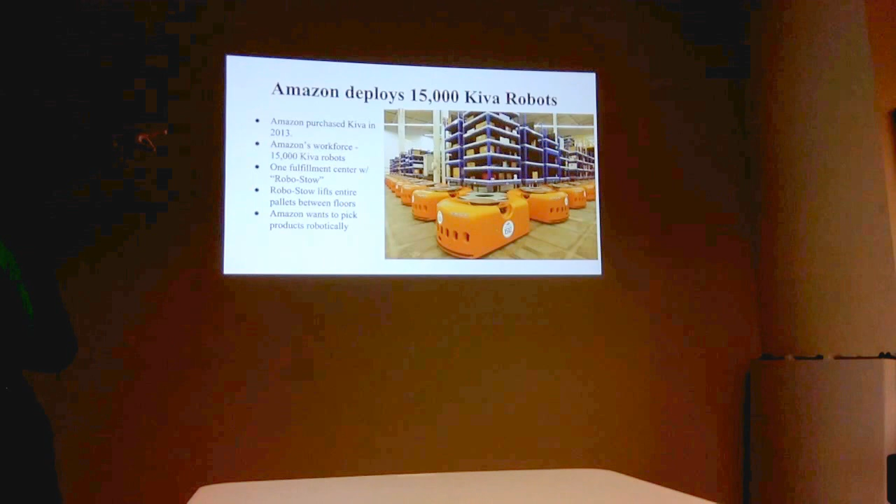One of the things you have to figure out is: what product am I looking at and how do I grab it? How many of them are in the bin? How do I get around? That's part of the challenge. We decided we would approach that with a Yale hand, and Steve's going to talk about that a little bit later.

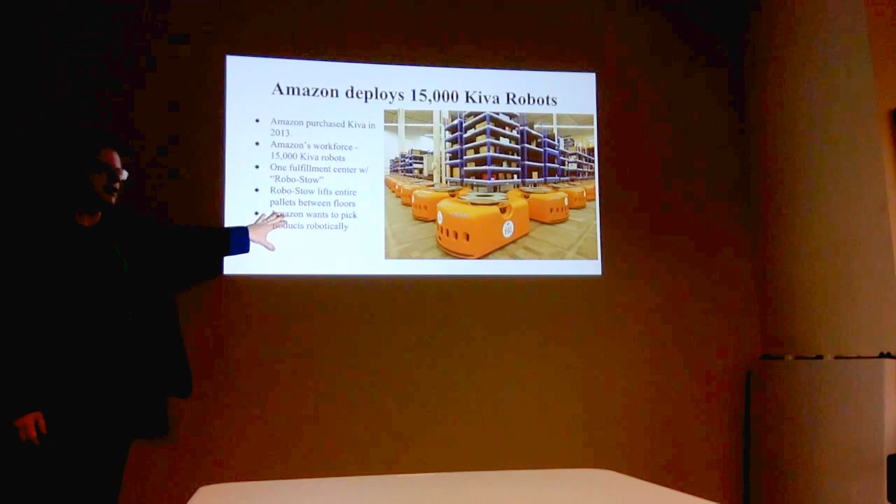Amazon is sponsoring the challenge. They bought Kiva a couple years ago and have now deployed 15,000 robots in their warehouse. They're picking something like 6 million products a day and expecting to double that. They only have robots in about 10 of their 50 centers, and one center has this incredible robo-stow that picks up pallets and moves them from floor to floor. So they are really automating, and we're going to help them displace another 2,500 workers by going through this process.

Let's talk a little bit about the shelf. It's 0.78 meters to the bottom, so we'll have a lift that gets us there. Then you have to pick out from the 12 bins - they'll tell you what's in each, but then you have to reach into your database of objects and get the right file to reference. Then you have to use the vision piece to perceive which object it actually is, where it is, and how you're going to grip it. Dylan's been working quite diligently on how you get in there and get things.

So it's pretty simple: pick and place from 12 bins. You got to pick it without breaking it, put it down without breaking it, and the bin at the end has to be on the floor when you're done.

Does it start out on the floor? The bin starts out on the floor. It must. Cool.

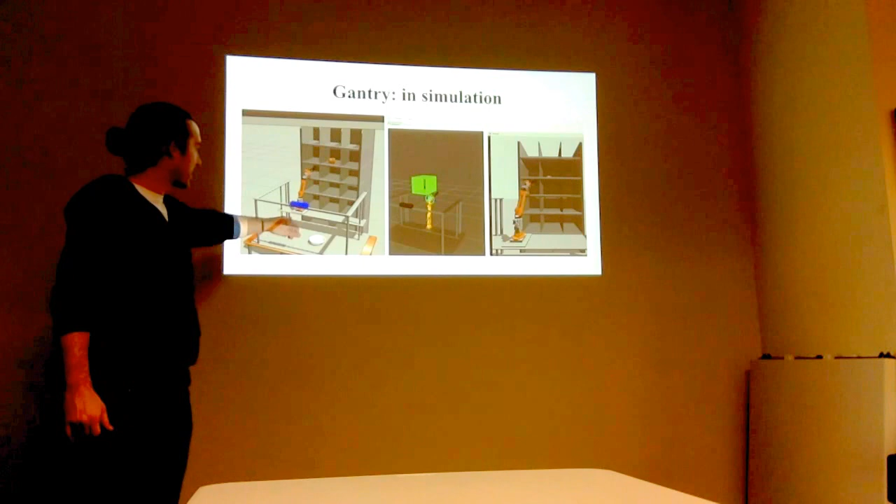So I'll jump in - that's the kind of challenge we're setting out to solve. We started by trying to model what we want to do in simulation. What we came up with was a frame that can be raised and lowered, with an arm attached to it. This is actually an open source arm, which Steve will talk about in a bit, that we found and built. The idea was you'd have this frame, and the frame would move the arm to the correct bin based on whatever the order was, because we know what's in each bin.

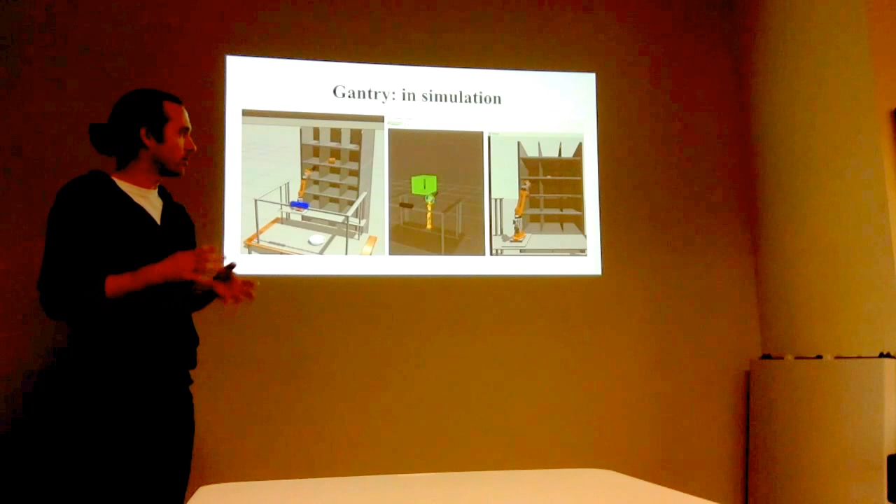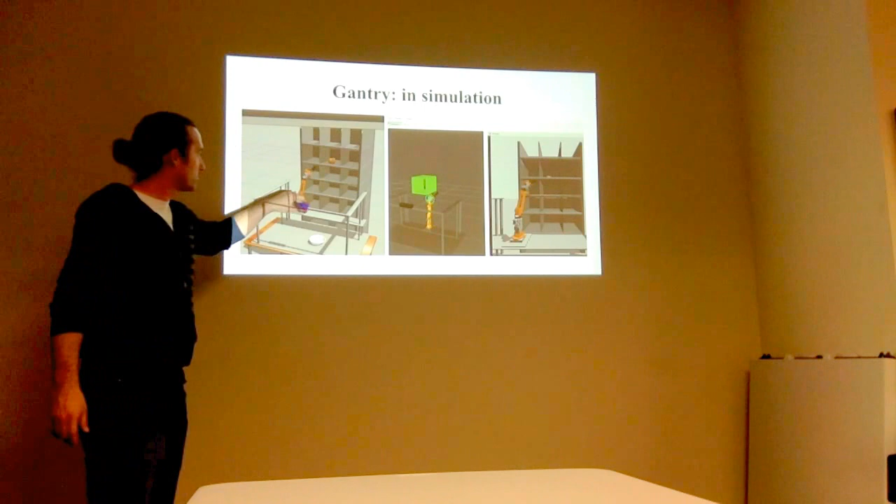From there we have a camera - this is actually in the simulation, this is the camera's view - which would find the particular object we're trying to grasp, and then the arm would reach out and grab it. We'll talk more about the software and hardware we're using to make that happen in a bit, but first I'm just going to talk about the status of the gantry, which is the thing that supports moving the arm to the right place.

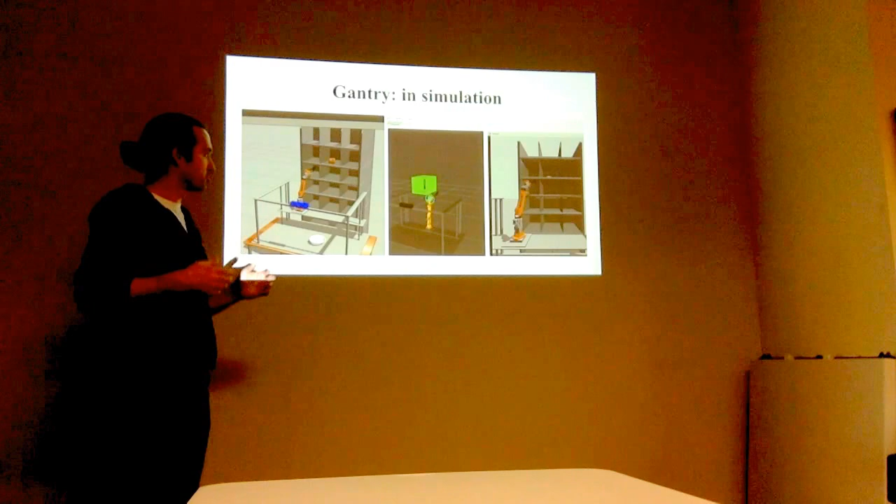So it started like this in simulation. This was something we did in Gazebo, and then we moved into CAD. So I kind of did a lot of this stuff, using a program called FreeCAD, which is an open source CAD software.

And we kind of modeled it out using 80/20, like a standard aluminum extrusion kind of building block system.

For the motion, you can't really see this that closely, but we decided to use lead screws attached to stepper motors, one here and then one at the other base there, for the Z-axis. So if we want the arm to go up, we have two stepper motors attached to two lead screws, which are like long screws. Those turn synchronized, and that raises or lowers the platform based on what we want to do.

Then likewise, for moving the arm left and right, we have another lead screw here, with a stepper motor kind of hanging off the end.

So really, we kind of modeled this after existing 3D printers. Like I have a Lulzbot TAZ 4, which has basically not the same design, but a very similar mechanical design. You know, two Z-axis lead screws, and then another one for the X motion.

And so we went ahead and purchased all this, what we could, stock from like McMaster-Carr and 80/20 distributors, different places across the internet.

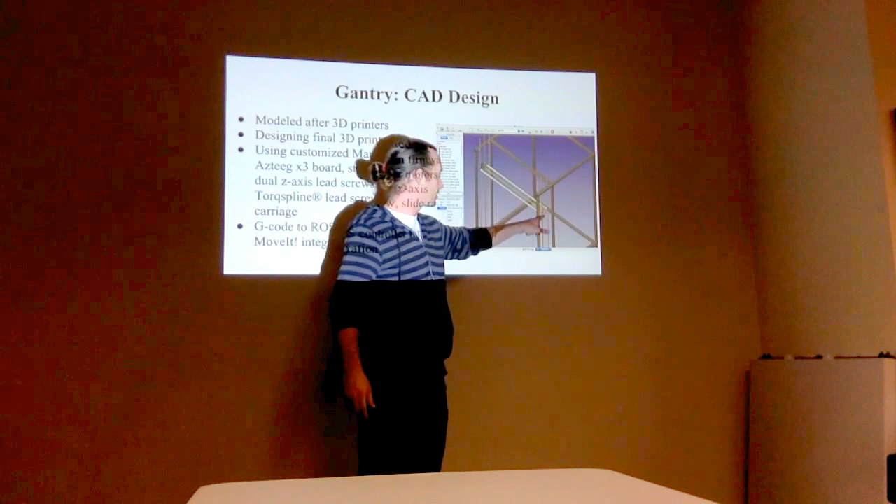But for these empty holes here, where these parts are floating in air, we're actually still going through the process of designing these pieces in FreeCAD and then printing them. So for example, I printed this part today, and I'm going to bring it to the office later. But this is going to go up here and hold the top of the lead screw.

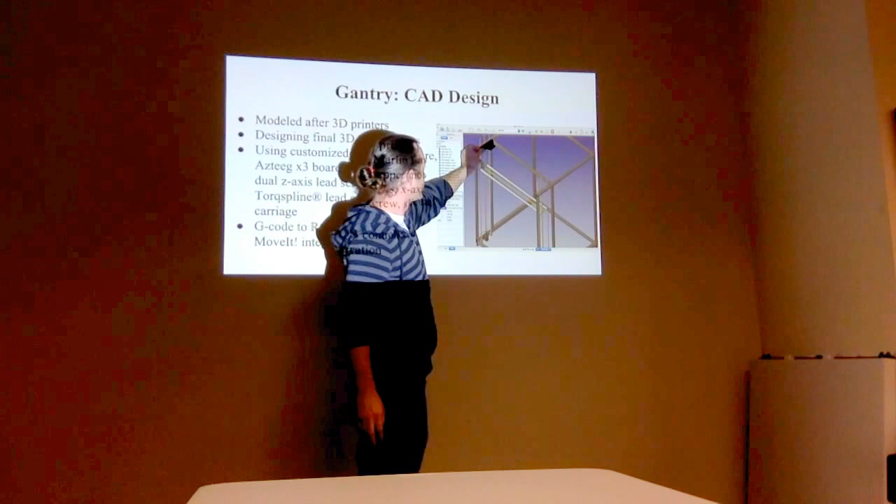So we're still in the process of actively designing and printing the remainder of our parts. So we still have some work to do.

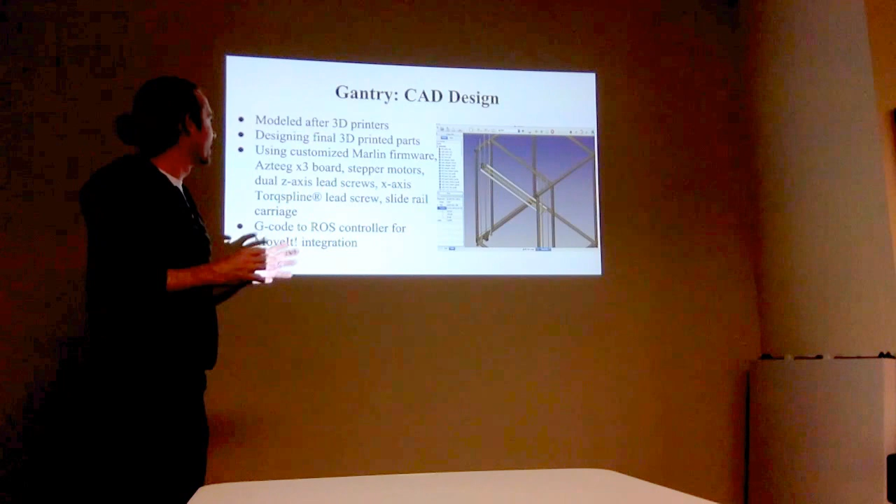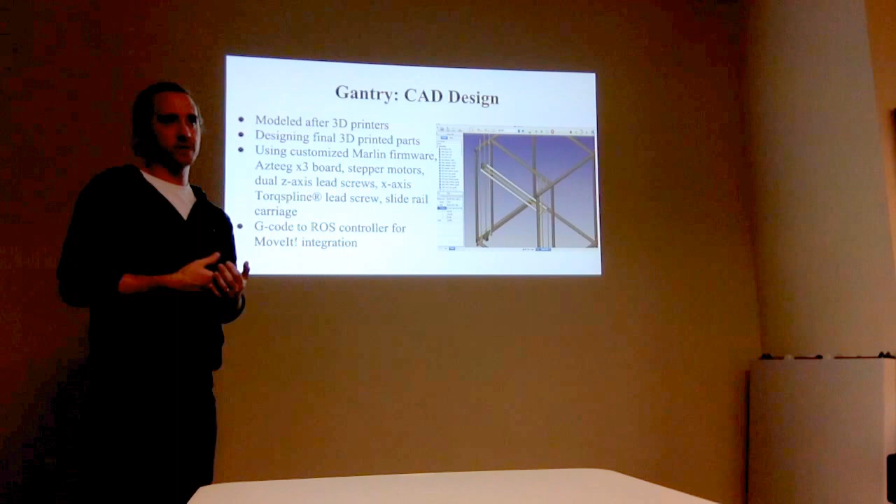So to actually control it and drive it, to make it go where we want, we're trying to leverage firmware that powers existing open source 3D printers. So there's a couple - there's Marlin, and a new one we found is Grbl. We're looking at both, and basically the idea is that we have a normal 3D printer controller board with stepper drivers on it, and that drives these steppers.

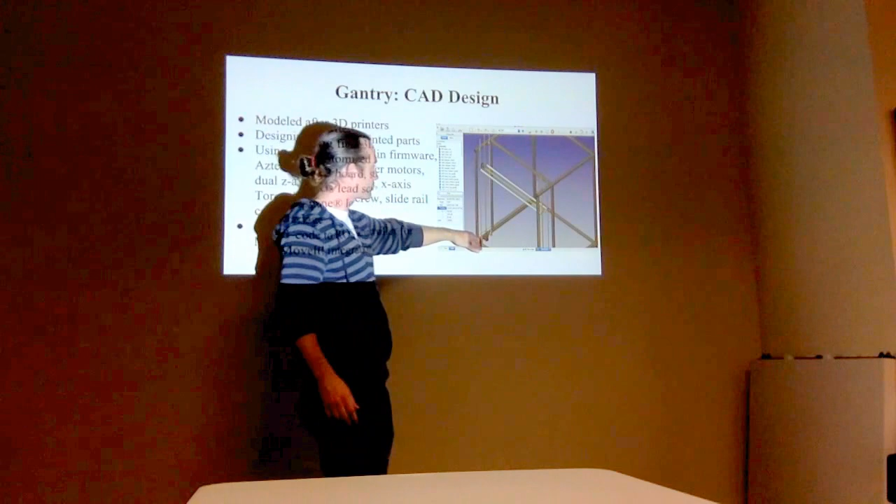We also have micro switches, just like a 3D printer would, to let us do homing. This firmware basically handles all that for us. It has homing built in. It has the ability to send the controller a position, like in G-code, and then it can travel to that position. So that's kind of our idea for motion control of the gantry.

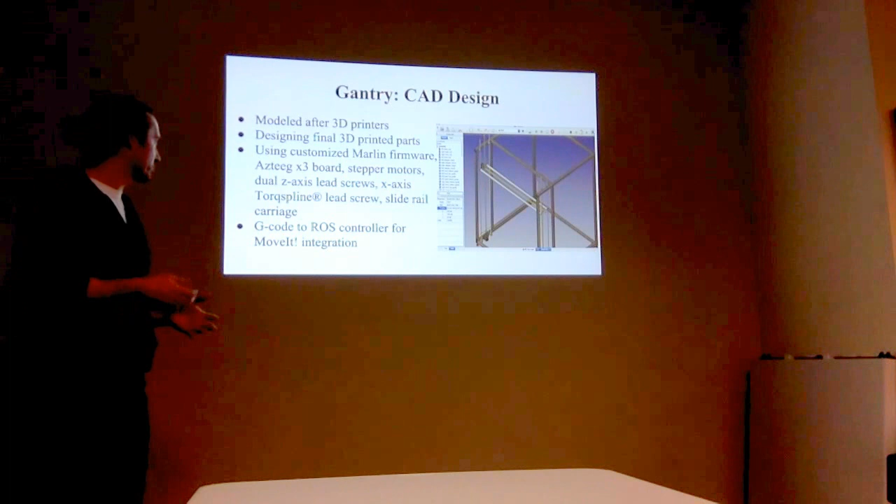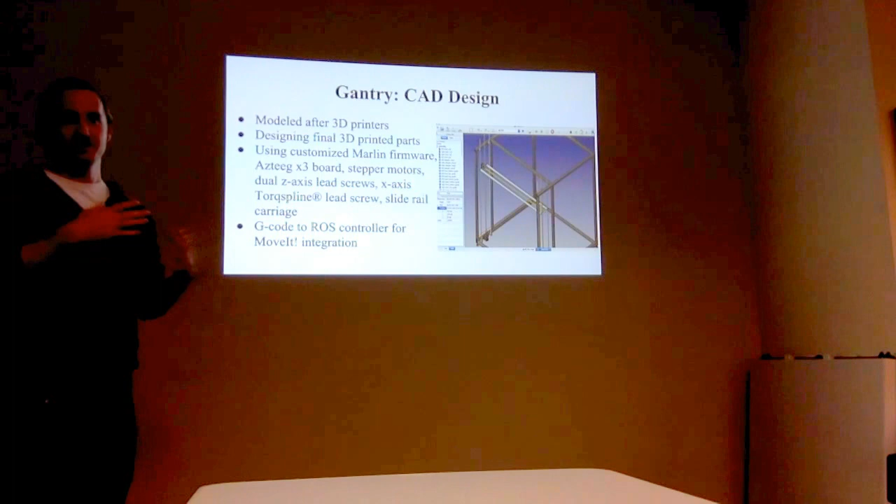So yeah, we use this different kind of lead screw, which I've never seen before, Torqspline, which is like a really aggressive lead screw. It's really fast apparently, so we'll see how that goes. Once we actually get this assembled, which we're pretty close to, probably hopefully next week, then we'll see if the steppers we have are strong enough to really power lifting up the rail.

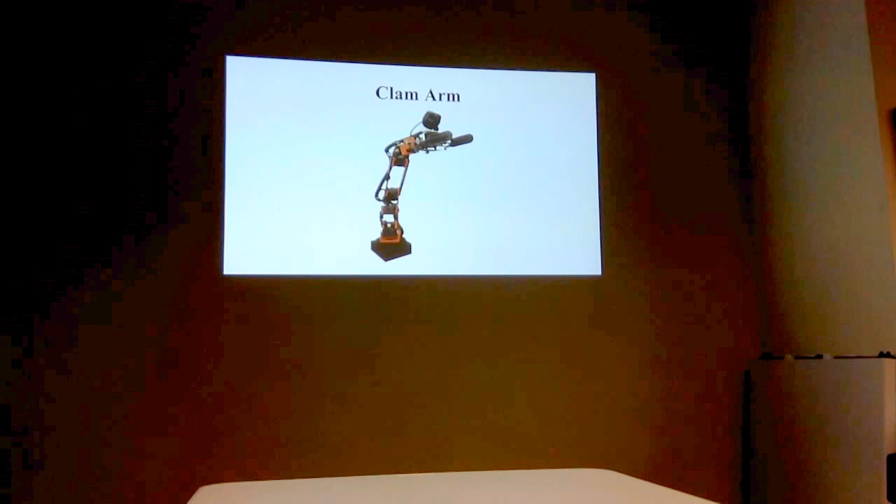All right, I brought in the clam arm. We've had some problems with this, so let me introduce you to the University of Colorado open source clam arm, or as my students call it, the dead dragon, because they've never seen it move. I have. We have a video.

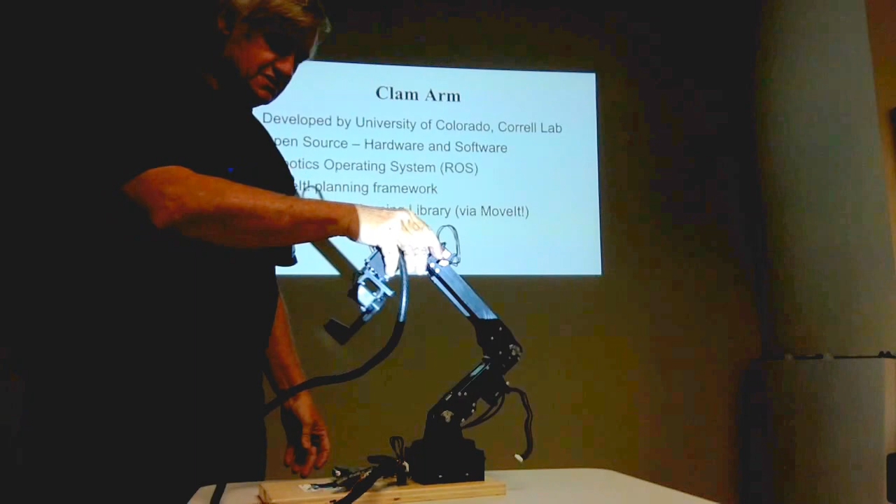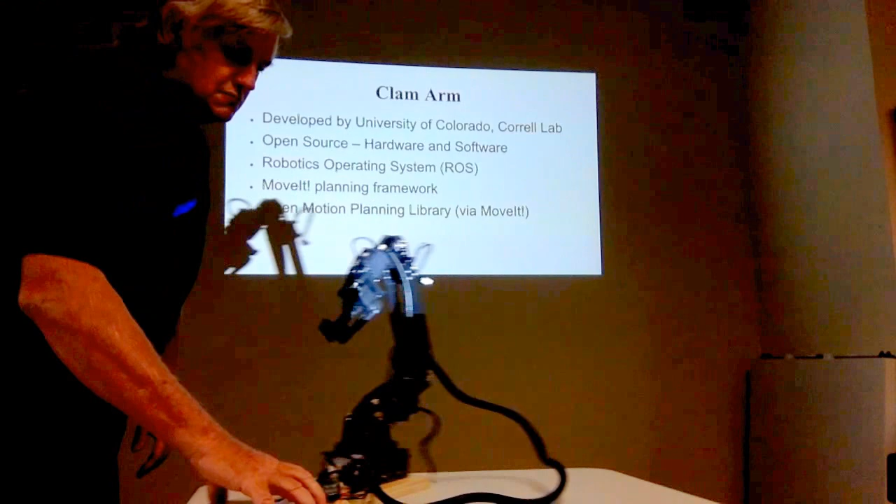Yeah, it really does work. We had to replace one servo because we don't really understand what happened to it. For some reason, it has failed us. The one at the base. Yeah, of course, it's always the biggest one. Yeah, it had to be the most important, the $500 one.

It's developed by the University of Colorado, which they did a pretty nice job with. The hardware is not the hard part, it's all the translations that it has to go through. It's a 7th degree of freedom, so there's a lot of translations and rotations going on. It is open source, so if anybody wants to go make one, feel free to do it.

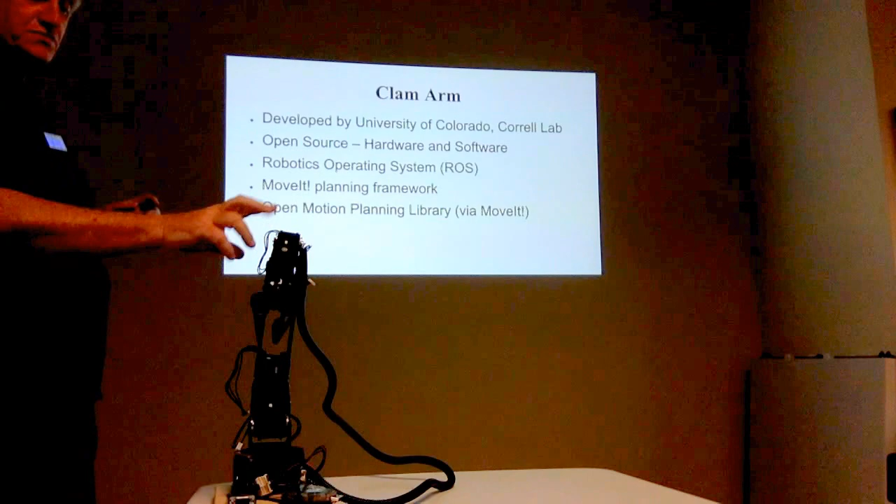The software operates with the Robotics Operating System and the MoveIt planning framework, so it easily integrates with the stuff that Dylan and Levi are familiar with. Dylan mentioned OMPL before, it's the open motion planning library, and hopefully we can integrate this pretty easily. Levi has had it kind of moving and kind of doing, but one thing they didn't tell you in the instructions was about the orientation of the motors, and that was a real problem.

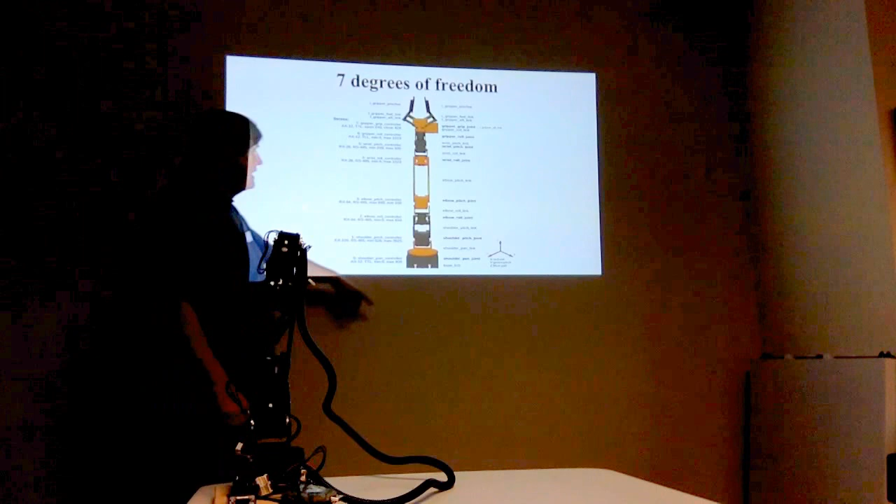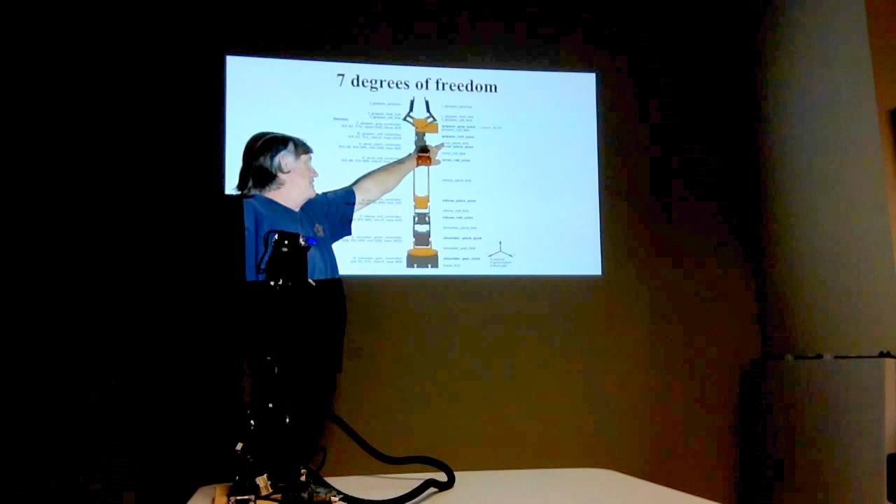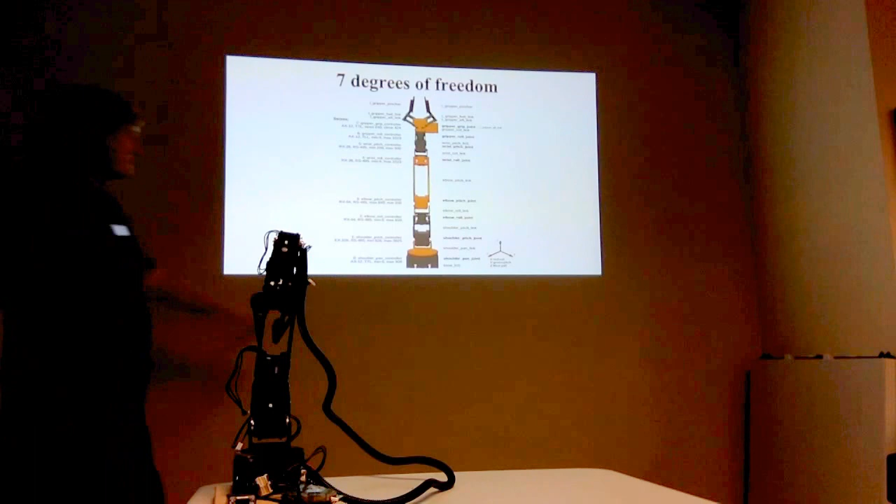7 degrees of freedom: we have shoulder pan, shoulder pitch, elbow roll, elbow pitch, wrist roll, wrist pitch, gripper roll, then the gripper joint, and then the gripper itself. So it's modeled after your arm. This base rotates, so that's where everything starts, and then it ends up with the closing of the gripper. We finally got that working.

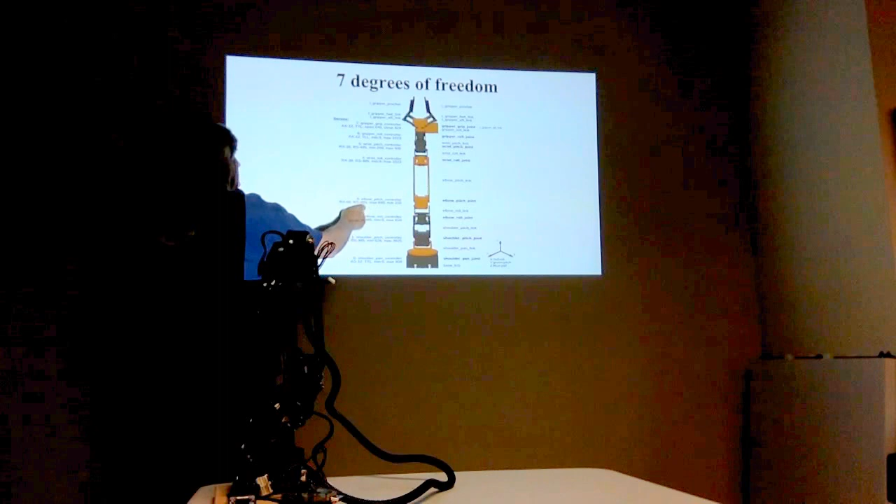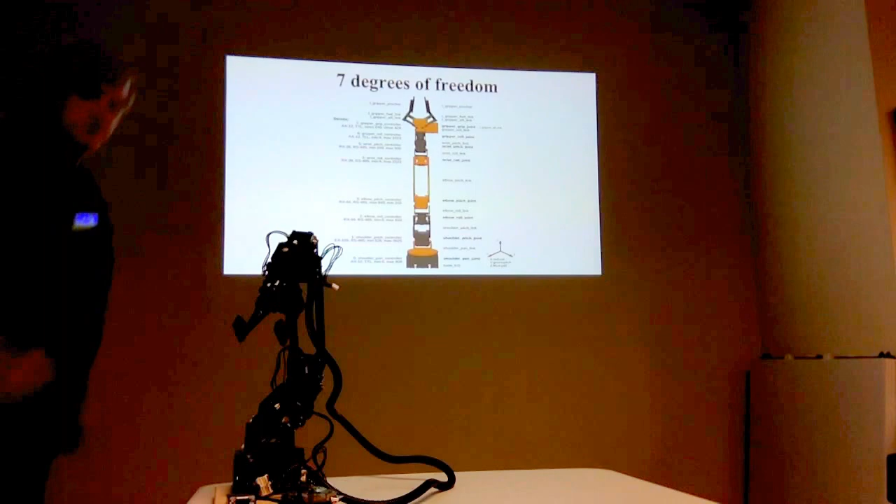They very kindly have mixed TTL with 485, 485, 485, 485, and way out the end is TTL again, so it's all serial communications. It's all jumpered together, so you have to take one jumper from here and put it way up there, and then everything else stops a little short. That's why all these wires are sticking out right now, because they eventually will have to be plugged in and secured properly. Don't go anywhere.

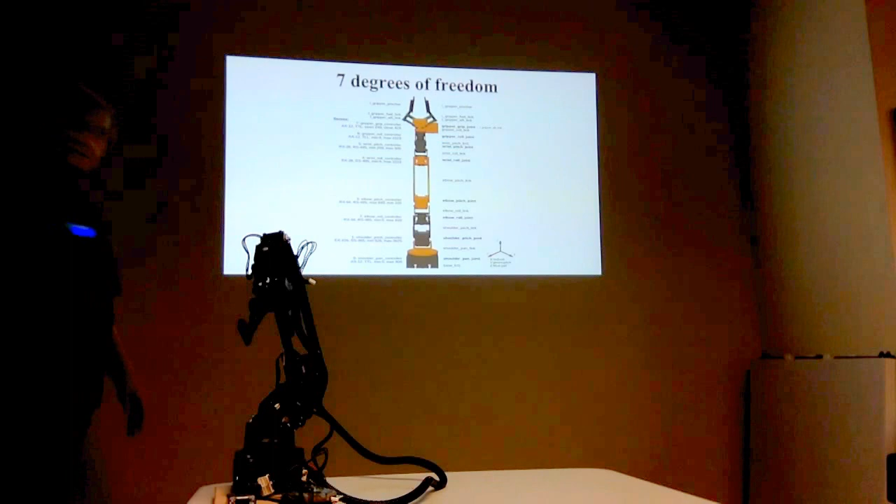Steve just rebuilt this because we had the servo that went out, but then also we laser cut the Delrin, the material holding it all together, which is kind of plastic. We tried to do it first at the Fab Lab and it didn't work, they were only able to cut acrylic on their laser cutter, so we built it with acrylic, and then we finally joined Maker Place and could cut Delrin, so now we have Delrin. The acrylic is really brittle, and when you start putting forces like this, with these very powerful motors, I was afraid we'd crack the acrylic because it's so brittle. Delrin is a lot more flexible and can take some punishment.

Drawbacks: open source documentation is poor to non-existent. It was very, very difficult trying to figure out which pieces went where. As you saw in the previous slide, they had the arm extended, but you really didn't get the detail as to orientation of the motors.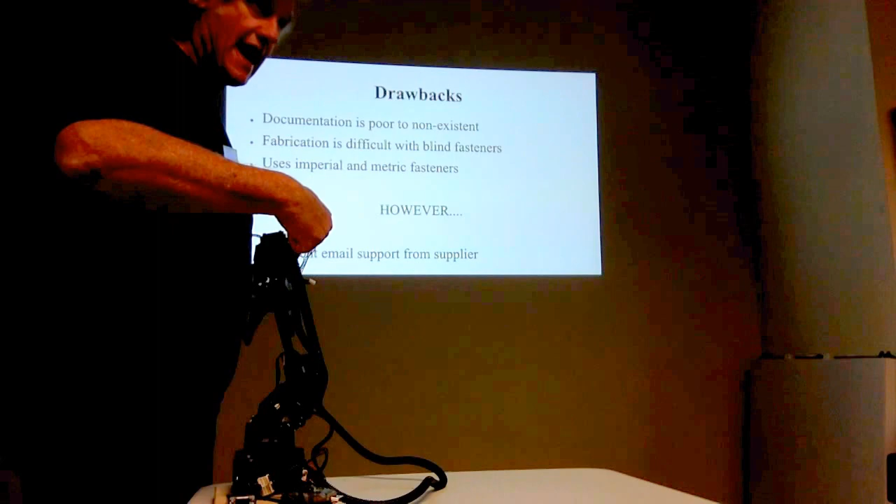Fabrication, difficult with blind fasteners. Some of these, like this one, there's a nut in the back. Well, how do you put that nut in there? I had to go super glue the stupid thing and play with that and thread it out, but the super glue got in the threads, so that was a mess. So blind fasteners is a real problem, something a normal industrial engineer would catch and take care of.

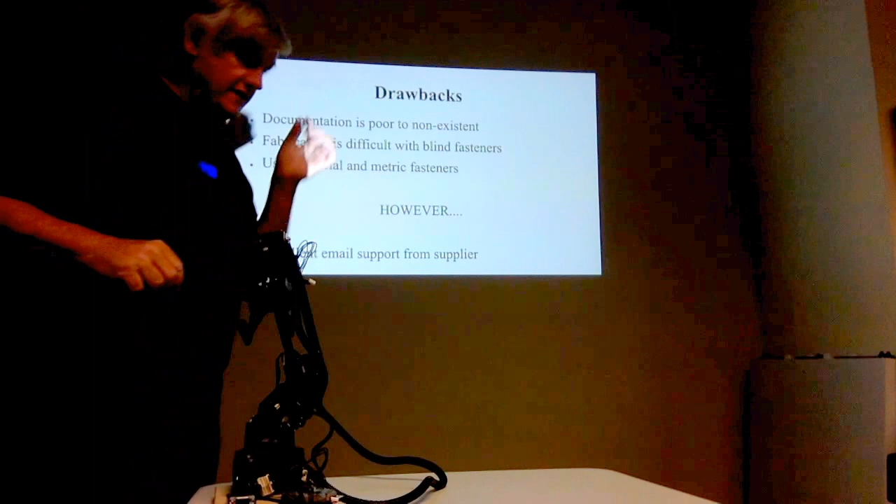What does that mean, a fastener you can't see? Yes, you can't see it, plus there's no way of taking the nut once everything's together and putting it in there. It's like, put the nut in there. Well, there's no way for me to get in there. So the order of assembly is the issue. Well, they should have tapped the hole, yeah really, that's what they should have done. But I see, okay, students will take care of that.

Well, I've built this probably a half dozen times before. So a little bit of super glue here and there took care of that problem, but then you have to let the super glue dry and set, and had to go get a bottom tapper, because if you use a regular cone tapper it won't go all the way through. It's a mess. And here is my favorite bugaboo: Imperial and metric fasteners? Really? Come on.

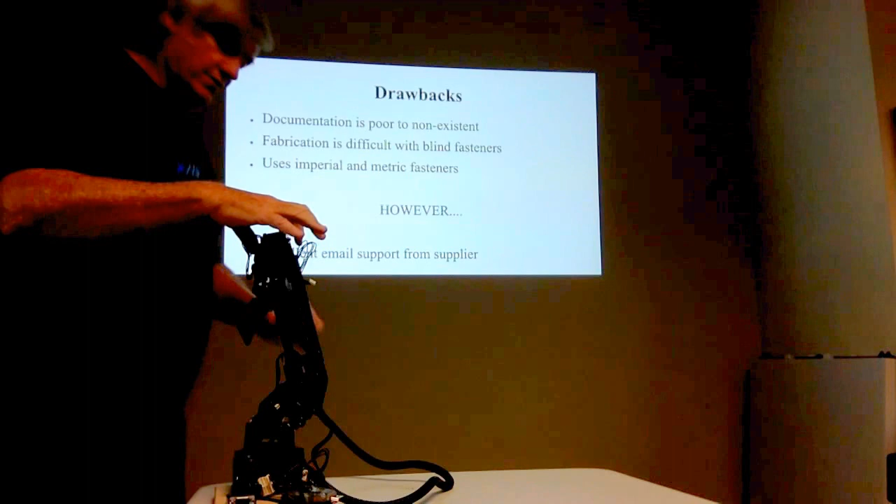Stick with one or the other, don't go with both, it really confuses the issue. Fortunately, all the horns you see are all metric, so at least we got it isolated to the horns. But all the fasteners that go in the side of the Dynamixels are all imperial. I don't know why people do that, otherwise known as English, or fraction. There's several different ones, 440, 632. Personally, if I was going to do it, I'd go all metric.

Metric to me, I teach my kids that - take 476 millimeters and divide by 2, or take 27 and 7/16 divided by 2. Which one are you going to choose? I'm going to choose the metric.

However, we do have excellent support from the supplier. They gave us a lot of hints. I know Dylan contacted them in the very beginning, and he says, if you're going to build this, you need this and this and this and all this other stuff. So that was very helpful, and they're very responsive. That helped a lot.

Next, I put this video in. Oh cool, this was a short video. So before I start it - the servos are telling the screen what it thinks its positions are. You can see, obviously, this is before Steve rebuilt the arm. We have some alignment issues with the servos. They're all - and the shoulder servo in this example here was also not working. So it's just going to move, that's all it's really going to do.

And it's reporting to the computer, which is then tracking its pose, basically.

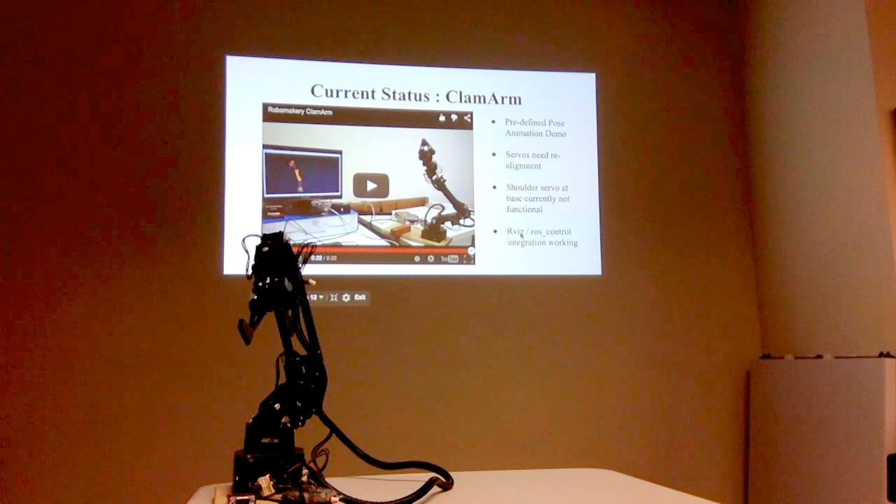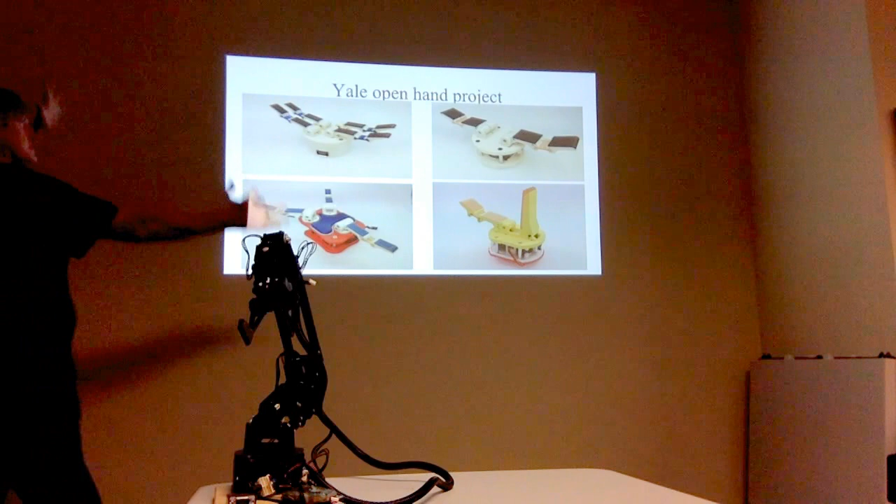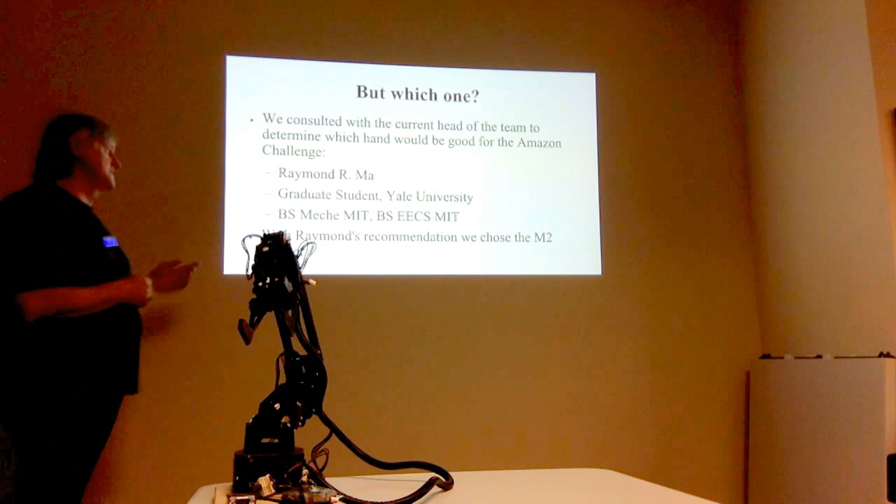So with this big selection we had here, which one's the best for us? We consulted with the current head of the team, Raymond, and he was very kind and responded to us like he's responding to all the other inquiries from the Amazon Picking Challenge contestants. He's a graduate student out there, and he is heading the Open Hand project as it stands right now. He suggested, due to the precision, grip, and functionality, to choose what is called the M2. Next slide - that's the M2 hand.

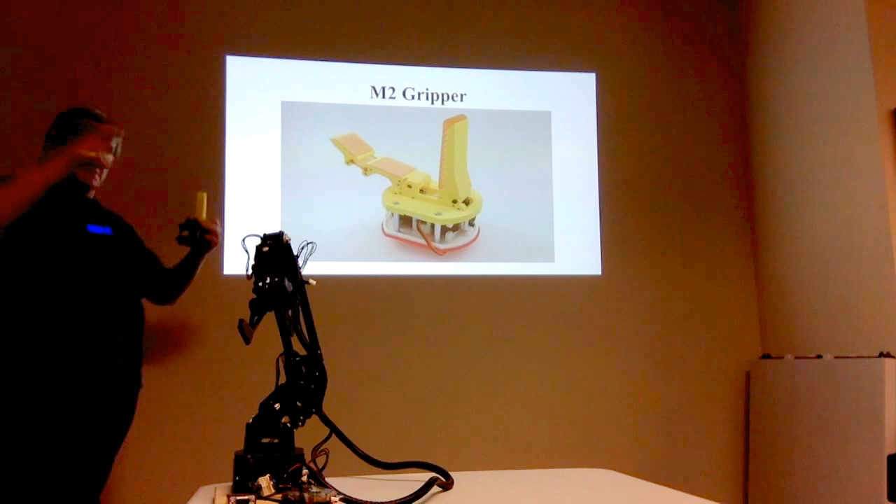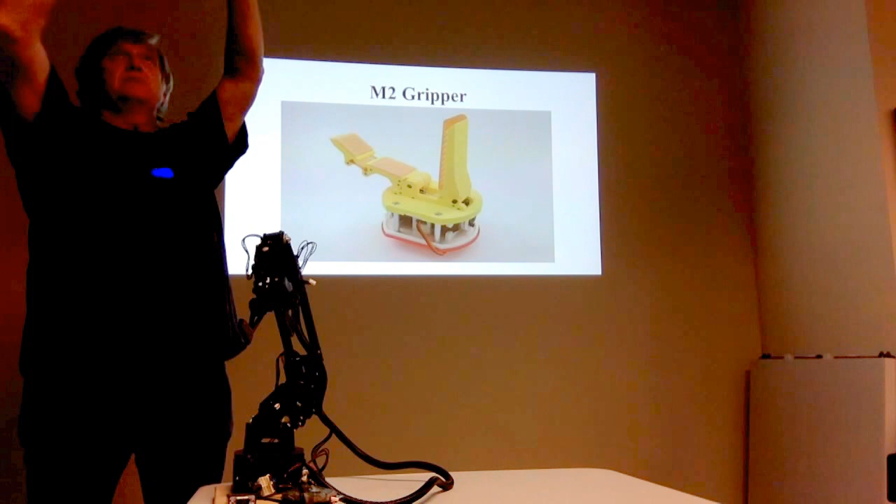These eventually - some of you can probably see this area right here - this is a friction polyurethane, it's good for grabbing things. Plastic would just slide right off, and they conveniently give you a mold. So what you do is you mix up your urethane, pour it in, let it sit 48 hours, and take these very thin pieces of ABS off, and you have that right there.

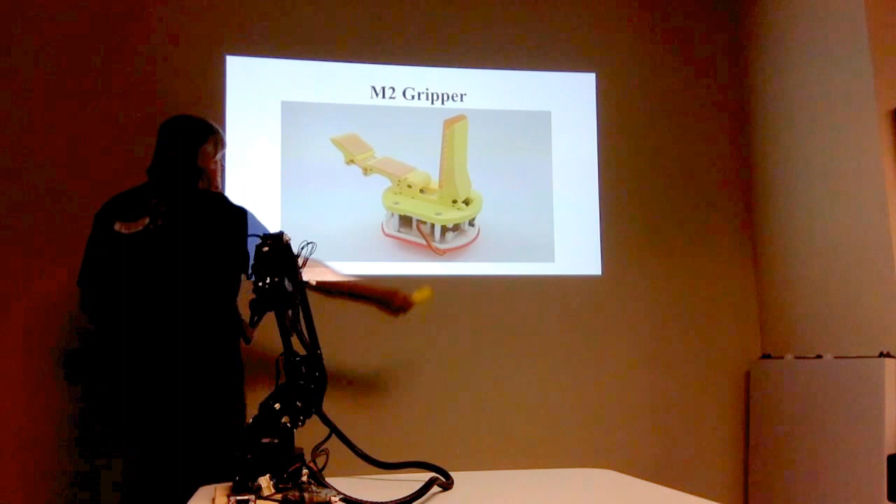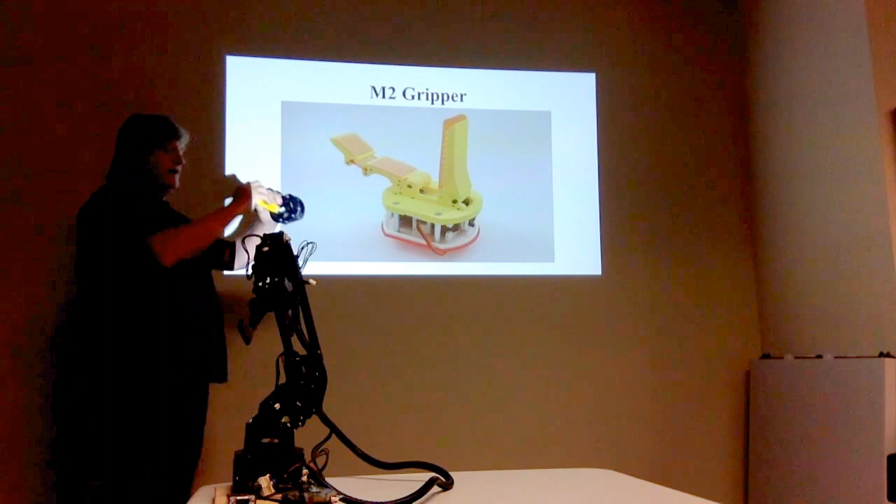Same thing goes with this one, except you see this flexible piece. This allows the movement of this finger - it's a flexible material. You also have to pour this, and it also has supporting material that you remove, and then it's free to flex. Now how do they flex that - is that a cable they pull on? Yeah, we'll get to that next.

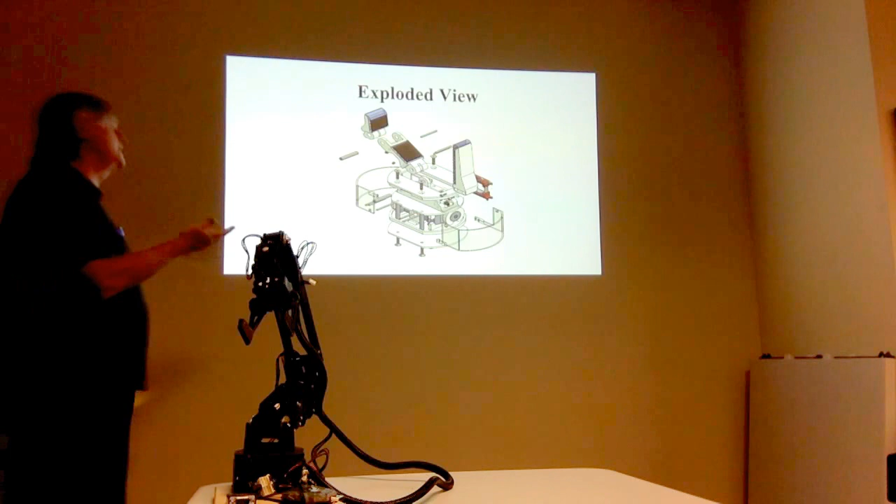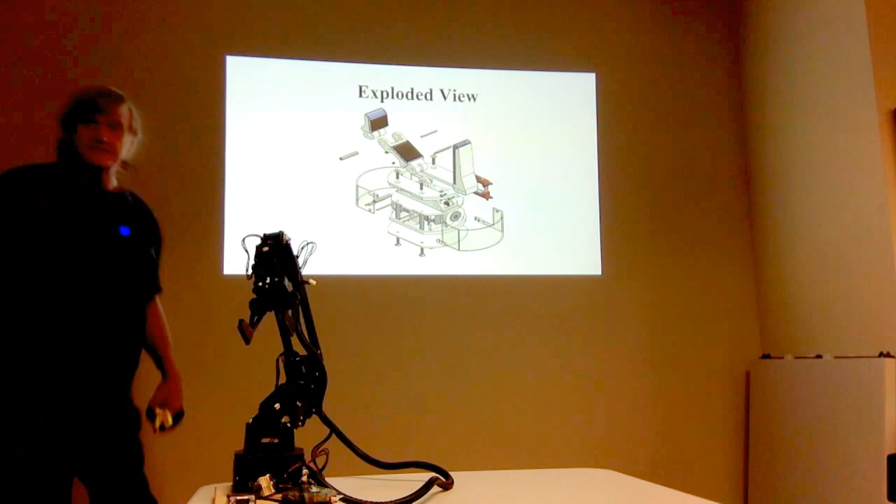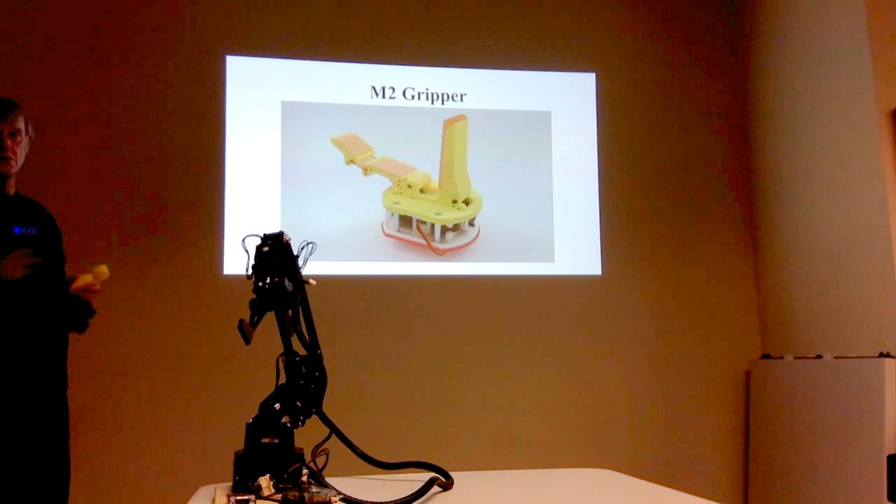Okay, this is an exploded view. You can see there are several parts. They didn't put it together the way I would put it together. These are very thin 3D printed points. What do you think the strength of that point is right there? That will go back to the next slide, the previous slide. That's why you don't see this on here, because it wasn't a very good design. It constantly broke, fell apart - it's just not a good candidate for 3D printing.

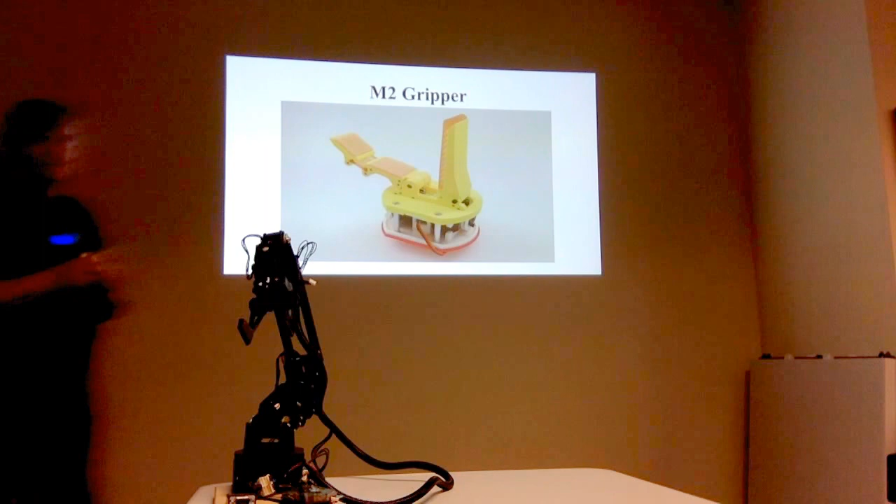Is that just a cover? It's just a cover, that's all it is. But they did a masking tape design on that. Okay, go ahead. How does this thing move? Anybody know what an agonist is? What's an agonist? It's the opposite of an antagonist. Great.

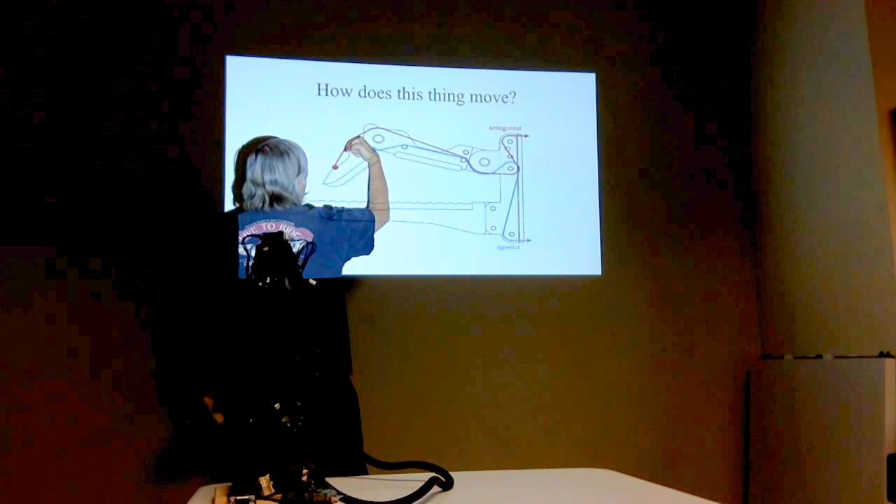An agonist is actually a muscle term that forces your finger to move. So when you flex, you move like this - this is the agonist. And then there's the antagonist, this one. So when you extend like this, this is the antagonist. This is the one that keeps the stability. So you pull down on this, all this starts going down, this starts moving this way, and that's what makes it close. This guy controls just the very end of the finger. That's all it does. So if you wanted to fully extend this thing, you release the antagonist. With the agonist, you pull it down.

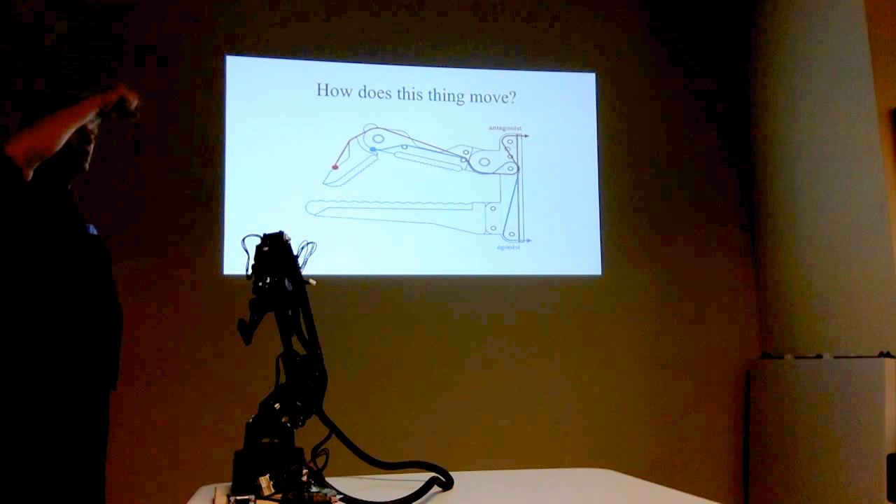One of the things they show in the video is they'll have a coin, and they'll take the thing fully extended like this, and then they'll curl that last knuckle, and that'll flip the coin onto this. That's all done with this route right here. So it's very, very dexterous. It can pick up very, very small objects. And with the friction padding, it really can pick up - I saw it pick up small pencils, coins. I saw it pick up a 25 millimeter by 25 millimeter IC. It just picked it up, slipped it up friction-wise, and away it went. So it was pretty cool.

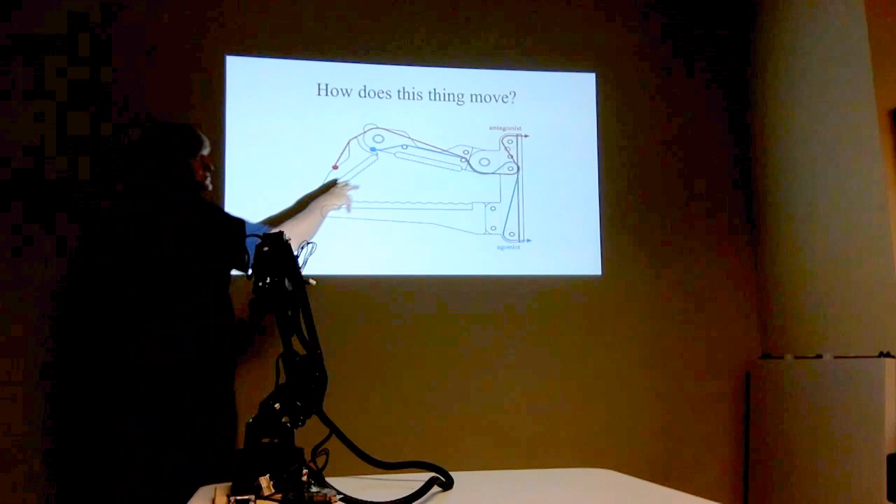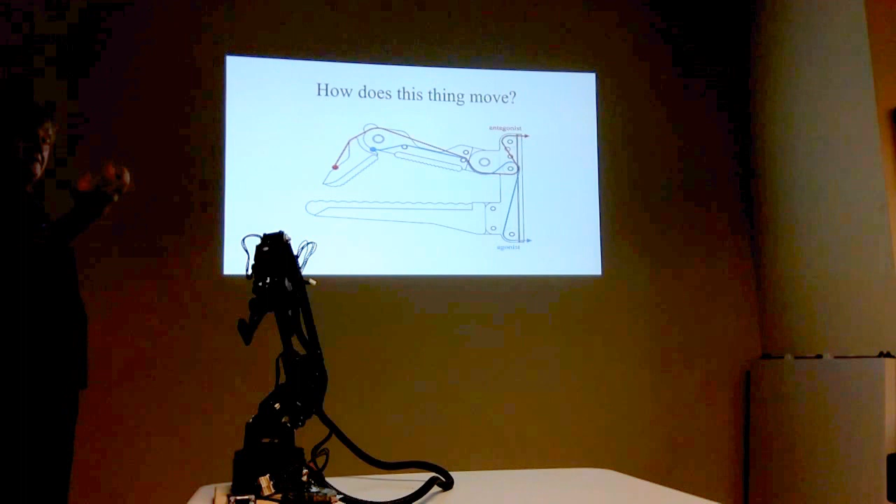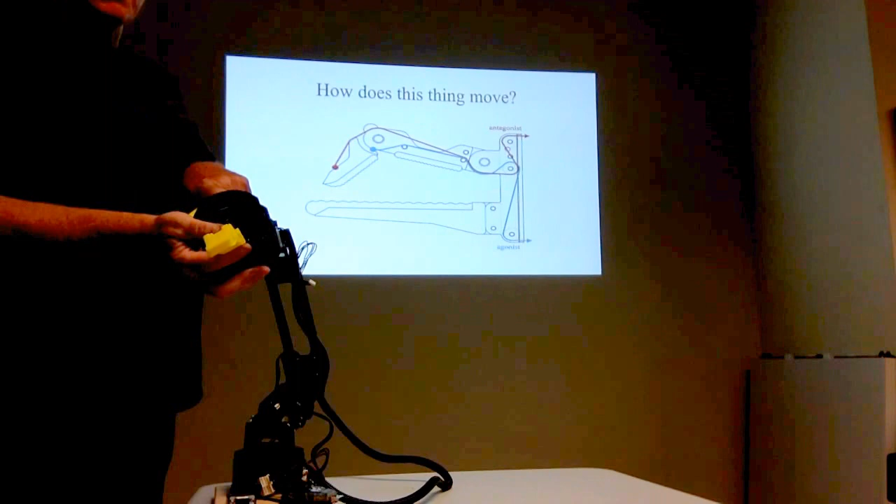So that's how it moves. And if you can imagine, it takes 2 servos to do that - 1 servo there, 1 servo there. So if you looked at your other ones, the one that had all those 4 fingers, guess how many servos were in there? 8. And 8 servos gets really heavy. And it's bad enough that you see this huge boxing glove on the end of some skinny guy's arm - that's the way I describe this. Because this is actually the smaller one.

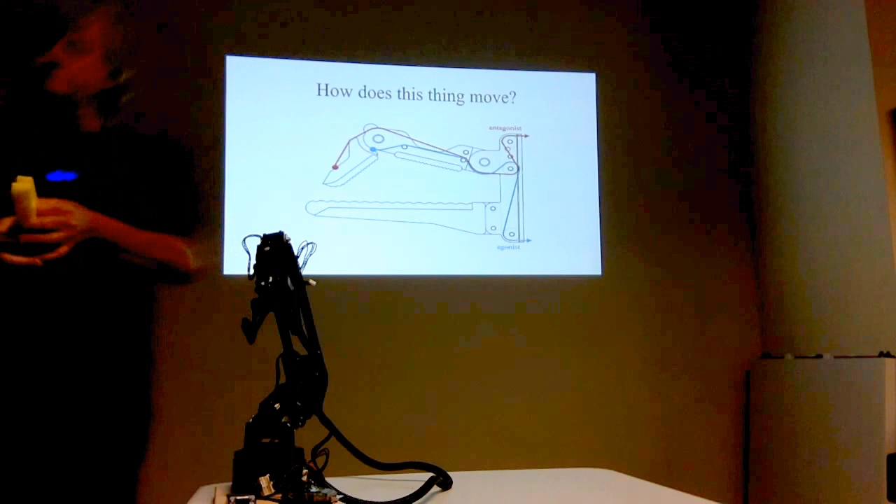It's the smallest, and if you can imagine a bigger one, it would overwhelm this arm. It looked funny. And the cubbies, the bins, are pretty small actually. It's kind of like when we actually built it, we were surprised - we knew the dimensions before, but actually seeing it, it was smaller than we thought.

Is that it? Is that the last one? Oh, drawbacks - everything's in SolidWorks. So if you don't have SolidWorks, sorry, you're out of luck. Many parts are 3D printed. Everything I have here and all the spares, including the ones that broke, are here. So you really get a workout on your 3D printer.

Some of the simple parts, like this one, take 6 hours to print. So you stay up all night watching your printer go.

He has a part numbering system, and he tried to explain it to me once before - I still don't understand how he does his part numbering system. It just doesn't make any sense to me. So I have to constantly go back to him and say, okay, for the Dynamixel, you want an A1 T2/M Dynamixel? Is that what you want? Yeah, that's it. What the heck does that mean? And he tried to explain it to me, and forget it.

I don't understand. Parts list and drawings do not match - that's again a huge problem. I went through, I've got a cabinet full of screws and nuts and all kinds of stuff, and I kept on going, well, this isn't fitting. Did the wrong screw get in my cabinet? No, it didn't. What's going on? Send them an email, get an email back - oh no, that's wrong on the parts list, you got to use this one. You're dealing with open source, what do you expect?

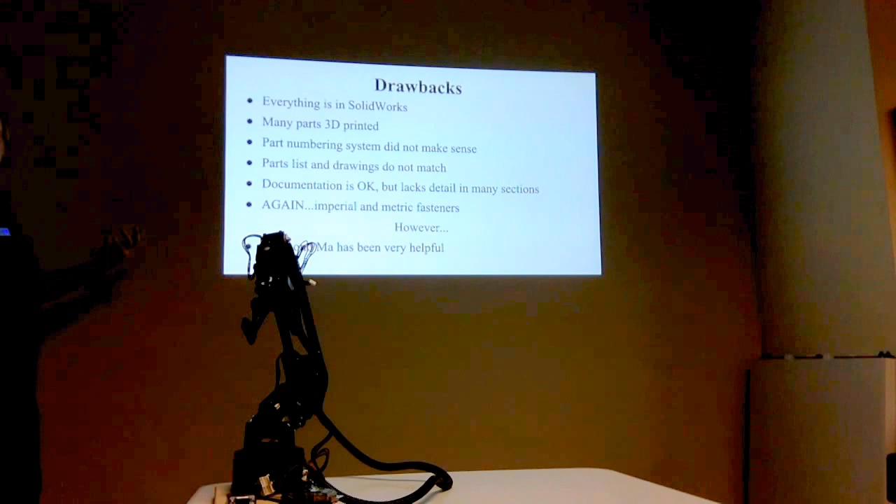So this is some of the problems, I'm sure anybody who's used open source is familiar with it. Same old problem. Are you feeding this back? Yes. Giving this feedback? Yes, in fact I'm a contributor. I finally figured out how to contribute on GitHub. Thanks, Dylan, for showing me how to do that. I had a hard time with GitHub going, what the heck is all this stuff? So yeah, I'm a contributor on GitHub now, feeding back all the changes.

So last little bit, now we just want to talk about what we're doing with the software piece. We did a lot of this in the beginning when we had to get the simulation ready for the presentation, and it's been on the back burner a bit while we figure out the mechanical design. But at a high level, we're using ROS, which I've talked about before.

Robot Operating System has a lot of packages, tons of things you can use off the shelf, and that was kind of our goal—we don't want to write any of this stuff from scratch if we can help it. Within ROS, some of the main packages we're using is MoveIt, which is high-level motion planning. With the arm, you define it with an XML file—all the links and joints—then feed it to MoveIt along with a list of end effector or joint positions you'd like the arm to be in, and it will do a calculation.

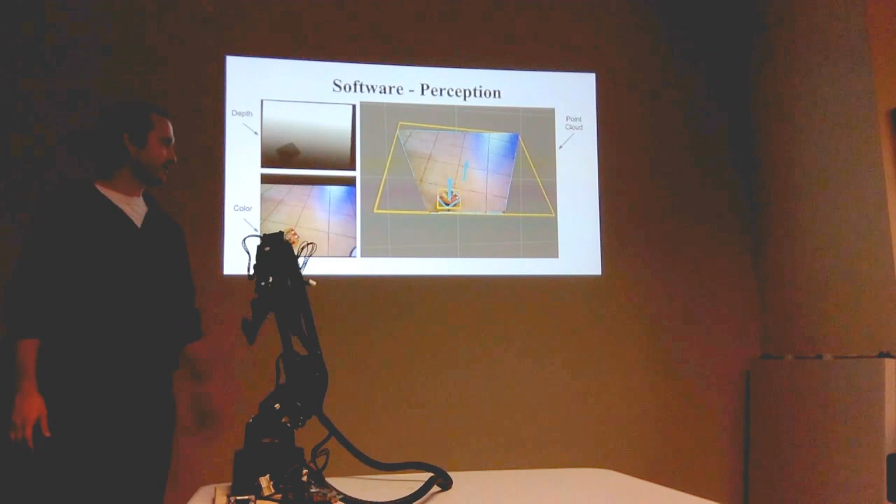Okay, so he's been working on this. We have a depth camera that's kind of like a Kinect, a little different, I forget the actual name, but it's like a Kinect but at shorter range. He's been working on taking a normal picture, and there's the depth and the normal color picture, and then using a variety of perception libraries to find interesting areas within that. So here he's identified that there's something here, and they kind of have an idea of the orientation of that object.

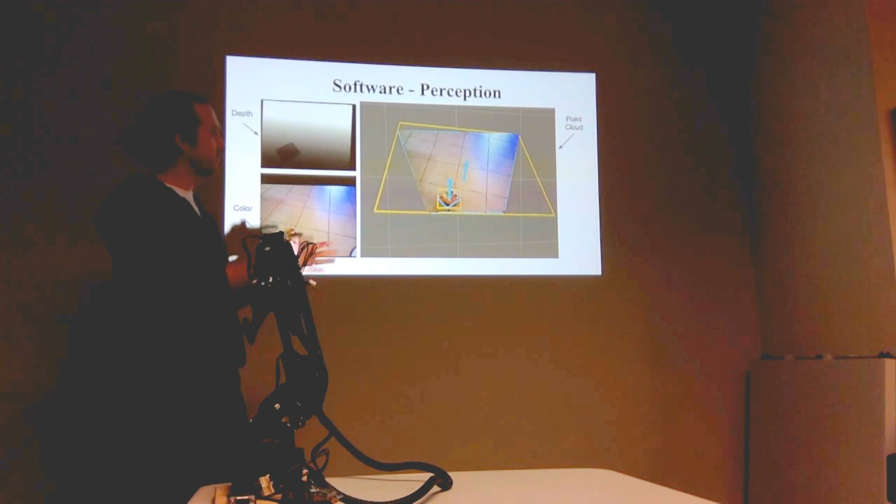So the idea is once you have this, you feed that into some other system which says, okay, it's a box and it's in this orientation. Let me generate 50 grasps that could work for that box, like I could go here, I could go all the way around this way, whatever. You generate a lot of them, you feed all those to MoveIt, and it will say okay, out of the 50 you gave me, only 5 are physically possible to move to, because you don't really know what's physically possible when trying to pick up this object. So you give it a lot of choices, and MoveIt comes back and says, actually this one is the best.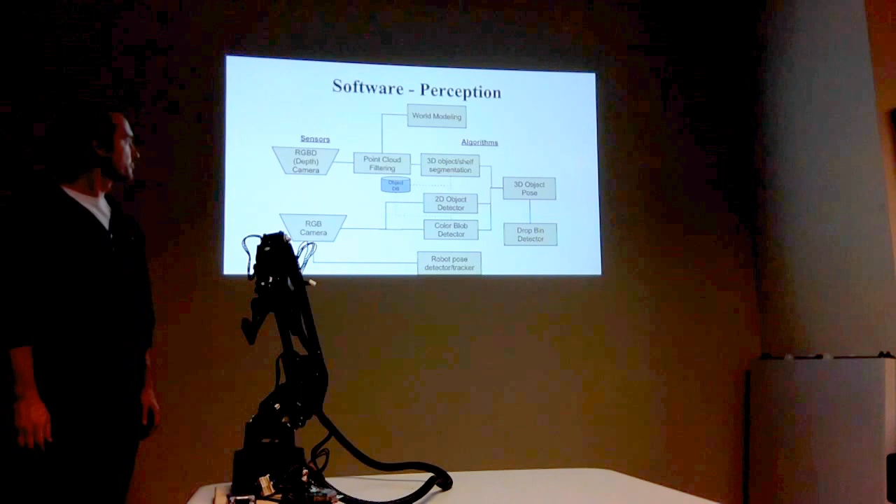Yeah, I'll let him talk to that some other time. This is kind of his thing. And that's it, that's all we have.

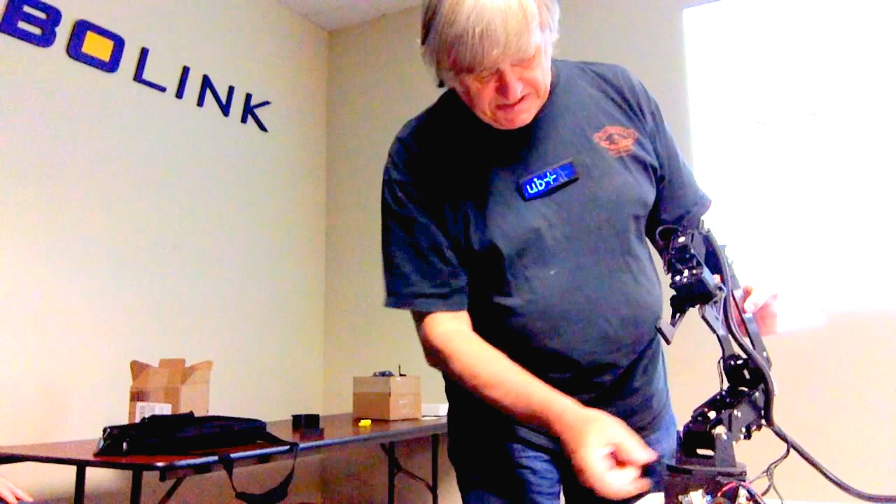Well, what do we got here? We've got these, we've got the base, we've got the box - that's all it is. The rest of the parts are 3D printed with ABS.

They're 3D printed, or these are metal? Oh, the brackets are metal, yeah - the horns are not, but the stress points are aluminum. So yes, you could do it in metal, you could easily do it in metal.

You'd have to go get that Chinese thing that drills square holes, though. Which is pretty cool - anybody see that on YouTube? No, sorry. A Chinese drill that drills square holes? I got a mortise machine.

Really cool. Yeah, well, I've seen mortise machines do aluminum and steel. That's it, really cool. It's not just a broach, it actually is spinning - yeah, it's a drill. Interesting, yeah, it's the way they move it up and down and then move it in. It's fascinating to watch, I'd highly recommend seeing that. It's very innovative - Chinese square drill. Okay, go figure.